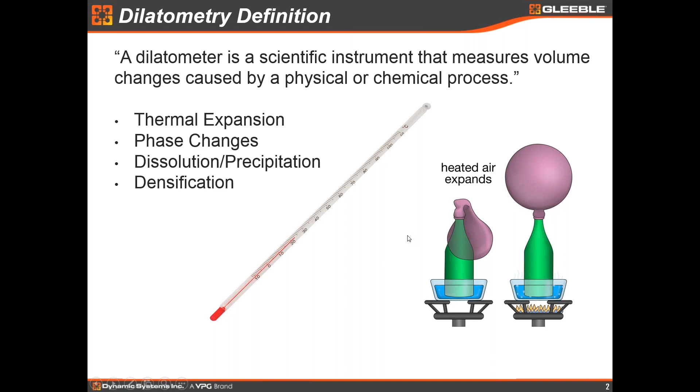Over here we can see a very simple, elementary school science fair experiment that shows heated air expands as we put a bottle full of air in either a bath of ice water or heat it up on a burner. We can see the air inside the balloon expanding. Essentially, that's all we're doing in a Gleeble: measuring the expansion of a metallic sample as we heat and cool the material.

As we heat and cool the material, there's a lot of things that happen in a metal that are a lot more complex than what I've just described. Obviously, the coefficient of expansion is essentially similar to what we've talked about already. Coefficient of expansion is fairly simple and fairly easy to measure. It's usually for metallic materials reasonably large, so the resolution of the measurement that you need to get a good coefficient of expansion is not really that difficult to achieve.

The other thing, and probably the primary thing that people use Gleeble for in dilatometry mode, is to measure phase changes. Phase changes are critically important in the treatment of steel, as the steel changes crystal structure from ferrite to austenite and can absorb a lot more alloying elements in austenite. Then typically we quench back down at a fast cooling rate from that austenite in order to get several of the different structures that you can get in steel - pearlite, martensite being two of the most common ones, also of course bainite, and then the spheroidized carbide, perhaps if we cool very slowly and let this pearlite carbides spheroidize.

Alpha and beta titanium are also very critical. There are a lot of titanium alloys that are designed around the alpha beta titanium transition. The alpha beta titanium transition is a much lower volume change transition than the ferrite austenite transition in steel, so it's a little more difficult to measure, but still can be measured in dilatometry.

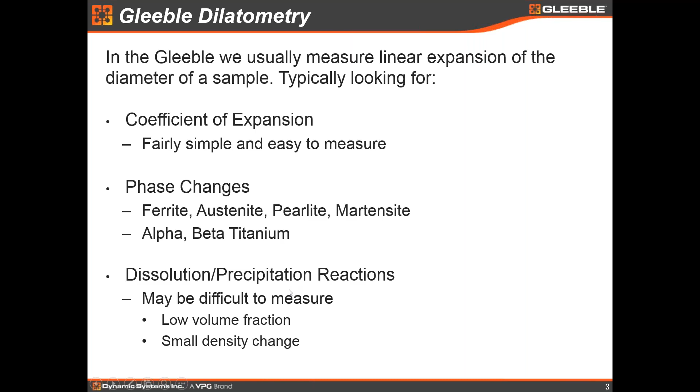The third primary thing that people use dilatometry in metallurgical research for is dissolution and precipitation reactions. Now, these are actually often quite difficult to measure. The precipitate in a metallic material is usually a very low volume fraction of the entire material. Therefore, even if you have a reasonable density change from a solid solution material to a precipitated material within a metallic sample, if you only have 2, 3, 4% volume fraction of that precipitate, it can be very difficult to measure that using dilatometry. And often the products of precipitation have a relatively small density change from the solid solution. Combining these two together means that it can be quite difficult sometimes to measure dissolution and precipitation reactions, but not always impossible. Just something to keep in mind.

I would like to point out that we do dilatometry a little different than most other manufacturers in that we usually measure the diametral change of a round sample. A lot of other machines are configured to measure the length change of a sample, and there are reasons that we do this, and I'll get into those in a little bit. Just keep in mind throughout this presentation that we do measure the diametral change typically when we're doing dilatometry in a Gleeble, and that is a little bit different from most of the other equipment that is out there.

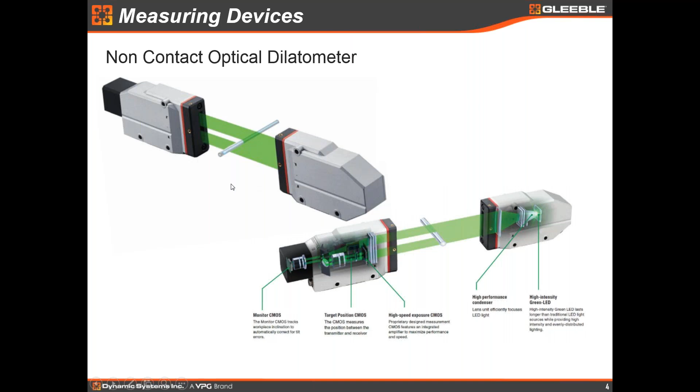I won't go into a lot of information on the optical dilatometer. It's a very nice device. It doesn't require a lot of setup. Once you have it attached to the Gleeble vacuum tank, you don't have to clip on or off the extensometer, so it's got some benefits. It does have some high temperature limitations, although the newest model is quite good. It has enough high intensity light to measure the dilation of a sample even at quite high temperatures when the sample may be fluorescing quite strongly as well.

I'd like to take just a moment to talk about the benefits of the Gleeble when you're doing dilatometry. The Gleeble is a bit unique in the world of scientific simulation equipment in that we use direct resistance heating to heat our sample.

I'll compare and contrast this a little bit to induction heating, though the same points will apply to furnace heating. In a Gleeble, we clamp a metallic sample between two grips, usually copper, maybe stainless steel, that are mounted in water-cooled jaws.

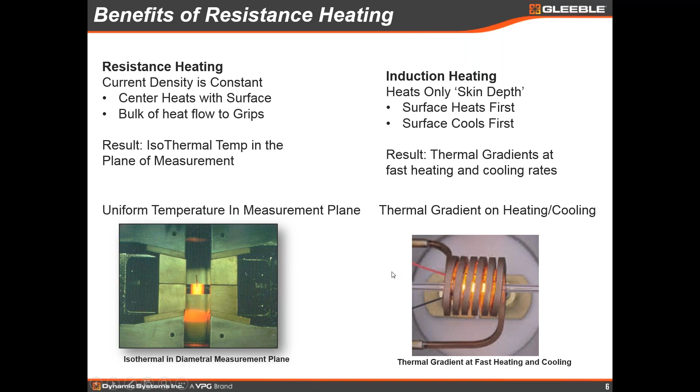This means I can cool at a very, very fast rate and maintain that isothermal plane in the center. Compare that to an induction heater where I'm probably quenching on the outside because I'm not extracting much heat through the quartz push rods here. My surface is going to cool faster. If I quench on the outside, I'm going to cool the surface much faster, but the center is still going to be hot. And again, I'm going to get thermal gradients in my measurement that are going to affect the results.

So again, similar to when we have this clamped in cooled water in copper water-cooled jaws, we get a very, very fast heat extraction rate from the ends of the sample. But again, the heat flow is almost entirely axial through the sample, which means we can get very, very fast cooling rates, while again measuring dilation in the diametral direction in the center of the sample, where we keep an isothermal plane, surface to center to surface. So we can get very sharp dilation curves, and we can get very good temperature readings of where these transformations occur.

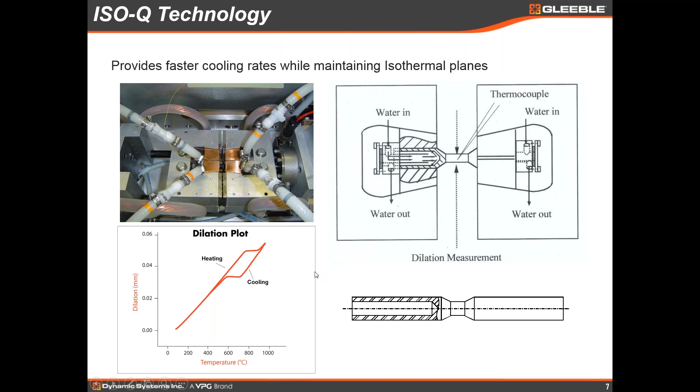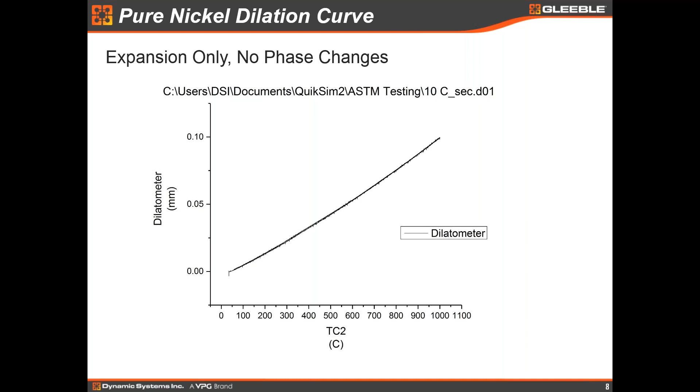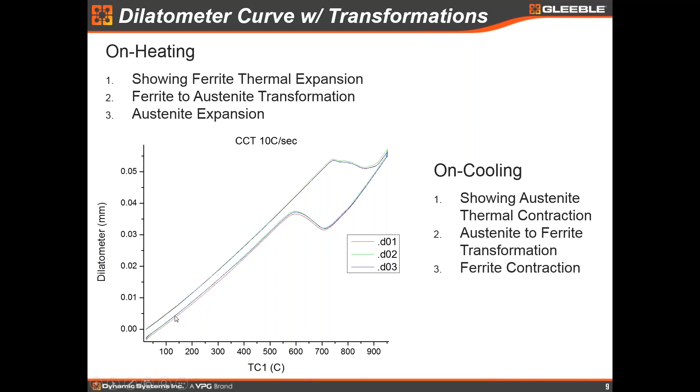So as we initially heat, the on-heating curve is simply the expansion of the ferrite. Then we hit a temperature where the ferrite starts to transform to austenite. We get the transformation, and once we've 100% transformed into austenite, we start again on a linear expansion of the austenite. Then at some point we hold for a few seconds before we start to cool, and we see the thermal contraction of the austenite. Again we see that phase transformation going back the other way as we cool, austenite to ferrite, and then we see the linear contraction of the ferrite as we continue to cool down.

So one thing to notice on all these curves is that there is an energy barrier to be overcome for transformations. Once we get to that point where ferrite and austenite are equally energetically favorable, we have to provide a little extra energy - either overheating or undercooling, depending on which direction we're going - to make that transformation happen. So what this means is that transformations are delayed a little bit until there's a sufficient thermal driving force to drive that crystallographic transformation. There can also be some nucleation times involved.

So if I was doing a quasi-static experiment where I was heating very, very, very slow and cooling very, very, very slow, I would still not have much of a nucleation time because I'd be going slow, but I would have an energy barrier to overcome. I'd still need some superheat or some undercooling to get these transformations to proceed. And you see that in the austenite to ferrite transformations, they're shifted, whether I'm doing an on-heating curve or an on-cooling curve.

One of the other things that's important to mention, and one of the big benefits that Gleeble has when doing dilatometry, is that speed matters. I've spent some time explaining why we can get good measurements at very fast heating and cooling rates in a Gleeble, where that may be more difficult to get in some other machines. The faster the cooling and heating rates are, the more these temperatures will shift based on the heating and cooling rate, and therefore the more that Gleeble technology becomes an important factor in being able to gather accurate data here.

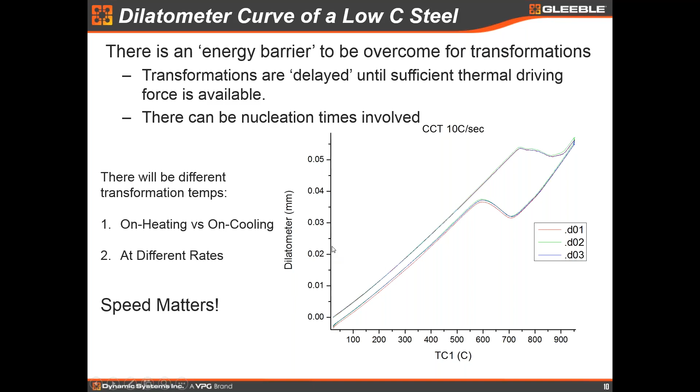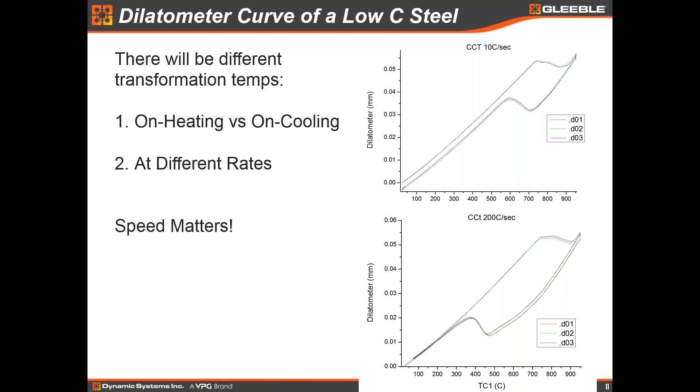This shows again the same low carbon steel, with a cooling curve at 10 degrees C per second and a cooling curve at 200 degrees C per second. I believe these are probably heated at the same rate, so there's not a lot of difference in the heating curve, but you can see a significant shift of the transformation temperatures on cooling to a lower temperature. That's based on the nucleation rate I talked about, and the fact that you need a little more undercooling the faster you're going to kick off that reaction. So speed does matter, and that's why some of the Gleeble features are very important when doing fast dilatometry for fast heating and cooling, for things like welding or other applications with rapid heating and cooling rates.

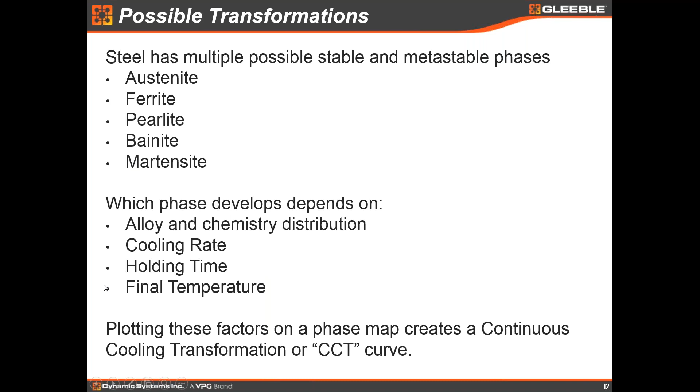I've mentioned a little bit about possible transformations that could occur in steel, primarily steel, although there are transformations in many other materials. Steel is a very useful engineering material because it has multiple stable and metastable phases. Depending on the properties needed in the final product, we can have steels that are austenite, ferrite, pearlite, bainite, martensite, or mixtures of any of these phases. Which of those phases develops depends on the alloy and chemistry distribution in that part, but largely on cooling rate, holding time, and the final temperature we quench to. So it becomes a big challenge in the steel industry to develop process maps showing which of these phases will develop under different holding times, cooling rates, and processing parameters.

If we plot all those onto one curve, we get what we call a continuous cooling transformation curve. This simply shows maps of different structures that can be formed on cooling of a steel, under faster, moderate, and slow cooling rates. If you superimpose those cooling rates over this structure map, you can predict, based on experiments done using dilatometry, what phases you're going to get. One of the tasks of many metallurgists developing a new alloy is to develop these continuous cooling curves so their customers know how to process the material and get the microstructure they're looking for, be that bainitic, ferritic, pearlitic, martensitic, or dual phase.

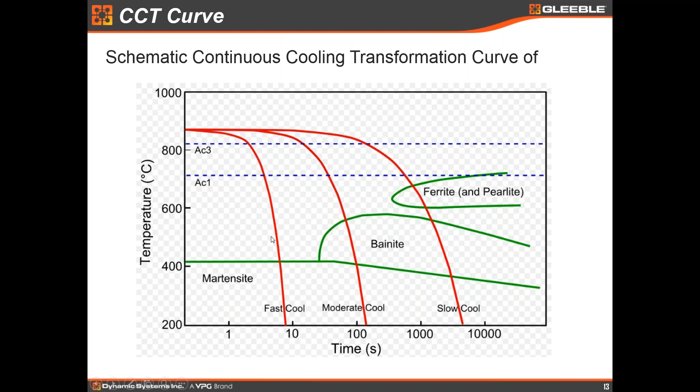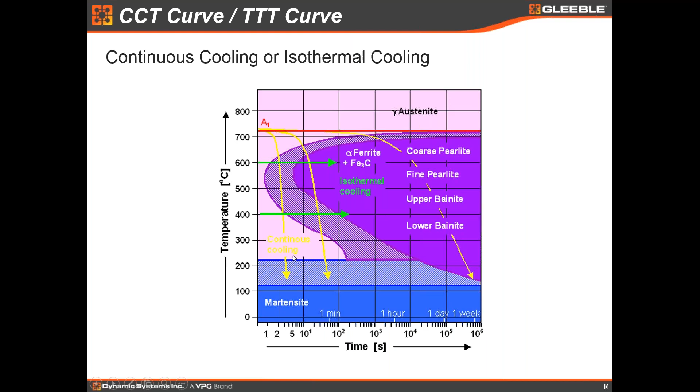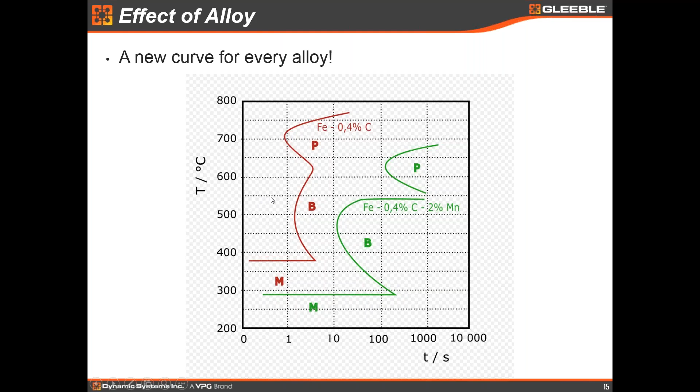This illustrates a bit more what I've just described, that the alloy is very important here. These are simply two CCT diagrams for the same steel, a 0.4% carbon steel, except one has no manganese and one has 2% manganese. You can see the manganese shifts all these curves over to longer times. So we would say this steel has better hardenability, because I can quench in martensite much easier in this steel, making it a more hardenable steel. Manganese is, of course, a well-known hardenability element. Chromium, molybdenum, boron, and other hardenability elements can delay some of these transformations and allow the steel to be more easily hardened, with a lower quench rate. And if I have a lower quench rate, I can avoid some quench cracking and other problems.

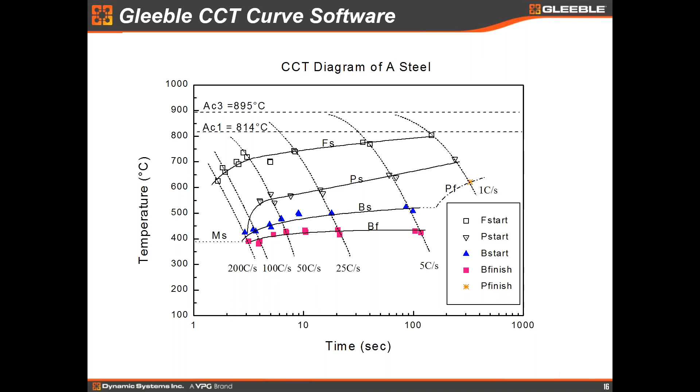This slide discusses how to create a CCT diagram with the Gleeble. The Gleeble comes with an option to not only do the dilatometric work to determine where these transformation points are, but to also plot them on a CCT diagram. I won't talk a lot about this software package, but I wanted to point out that it can take the data you generate from Gleeble dilatometry at different cooling rates, plot it on a map, and create a CCT diagram for any given steel you may be working with.

I'm going to go over, in these last couple slides before I wrap up my part of this presentation, a couple of questions that we often get about dilatometry curves.

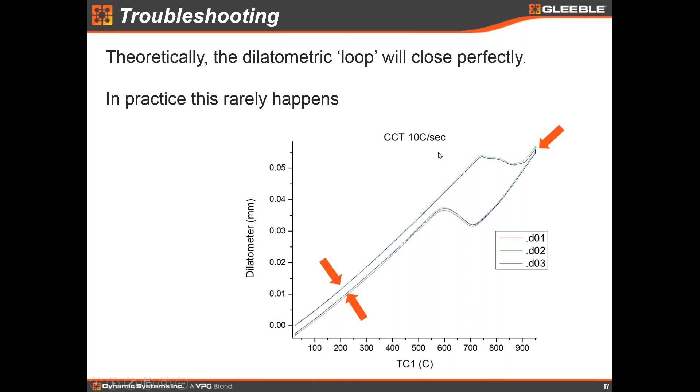Theoretically, a dilatometric loop, as I'll call it, a heat up, transformation, cool down, retransformation, and then cool back to room temperature, should close if everything is absolutely perfect, but in practice this rarely happens. In this diagram I have a couple things going on: I don't totally close the loop, so I've got a little bit of permanent change of diameter, illustrated by these two opposing arrows in the lower left of the graph. I also have a little bit of a decrease in diameter at the hold time when I transition from heating to cooling. I'll talk a little about what can cause these kinds of issues.

The primary reason dilatometric loops don't always close is that the phase you end up with after the experiment is often not the same phase you started with. This graph shows three different curves, and they're very repeatable, so it's not a problem with the repeatability of the system. What I suspect is happening is that I probably started with a sample that had a little bit of bainite or martensite in it. Then at 10 C per second, after I heated, austenitized, and recooled it, I probably ended up with a ferritic plus carbide microstructure. We know martensite has more volume expansion than a ferrite plus carbide phase, so I suspect that's what's happening here, though I don't know that for a fact.

Another thing that could be happening is that these are rolled samples. Whenever you do a rolling deformation, you get a texture in the material, so it's not truly isotropic, but has a rolled texture with preferential crystallographic orientation through the product. Once I heat that product up and cool it back down, I've randomized that texture and probably changed the dimensions a little bit, since different crystallographic planes have different densities. That's a very small effect, and I doubt that's what we're seeing in this graph, but it is something else to keep in mind.

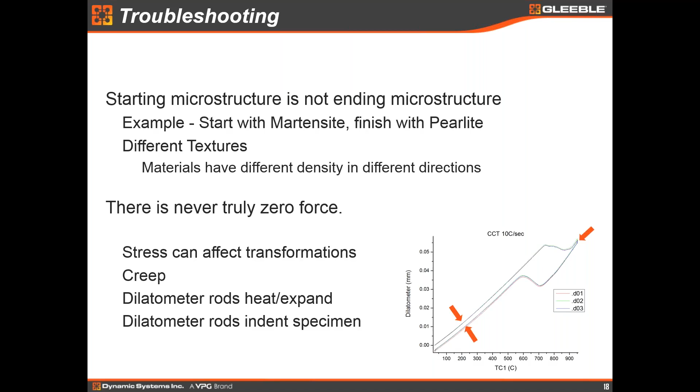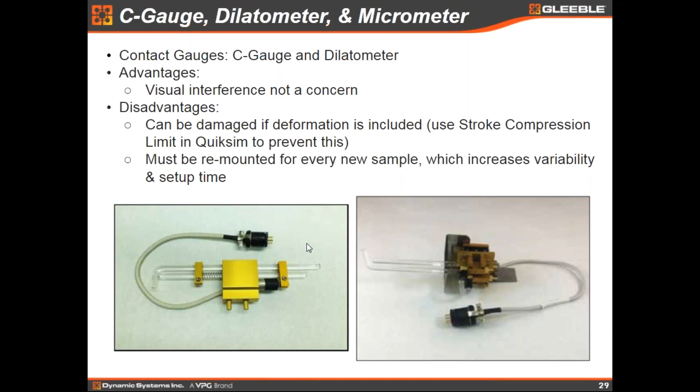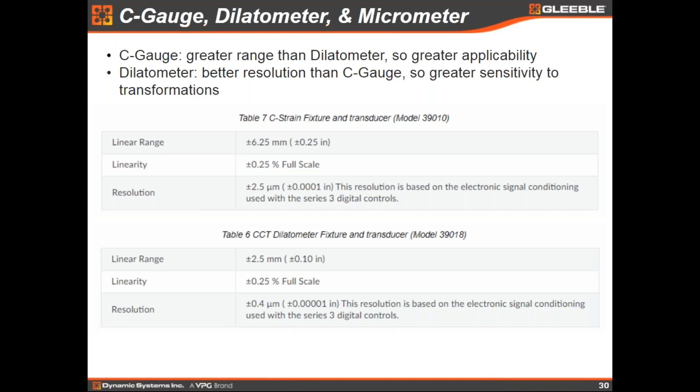Between the two gauges themselves, there are some differences. The C gauge has a significantly larger range, almost 3 times as much, but the resolution's significantly reduced, so about a factor of 5 or so. The dilatometer has significantly better resolution if you have very subtle transformations that are very subtle volumetrically—the CCT dilatometer will definitely be a better bet. If you expect to have much more significant change, though, you may have to use the C gauge instead.

So kind of conversely to what the contact gauges have advantageously, the micrometer is perfectly safe from damage unless your sample really explodes or something and goes right through the glass on the other side through which the micrometer is watching. But generally speaking, the micrometer is safe from damage from your dilatometry tests, so you don't have to worry about that at all.

And once you have adjusted, there's no need to readjust the micrometer. If your test doesn't change, it's a different sample but same dimensions, same presumed location of interest for the dilatometry itself, you can leave your micrometer just as it was, and it should work very, very similar the next time.

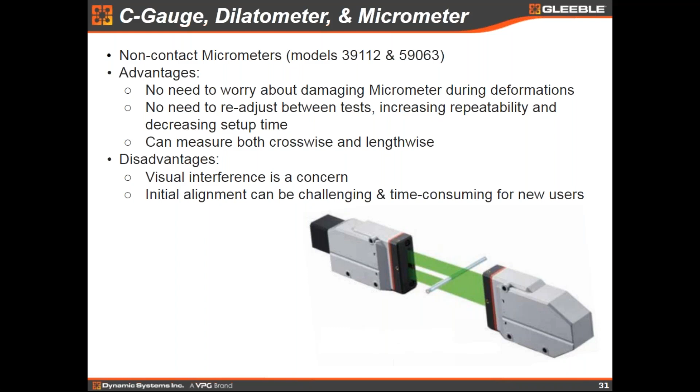Also, for newer users who haven't done it a handful of times, the initial alignment to get the beam to go properly from the transmitting head to the receiving head is a little bit challenging. It takes a little bit of getting used to. Most of the guys in my department can set them up in a few minutes nowadays, but that takes a little bit of practice. So newer users find it to be a little bit challenging.

A little more specific information about the two micrometer models. The 39112 model, as I mentioned before, is largely a legacy model at this point. Series 3 systems and the older GTC systems are what can use this device. Specifically in terms of the GTC system, that differentiates in terms of which wiring you have.

There may be a label on your load unit which mentions wiring revision, may say Rev J, Rev K, something like that. The pre-Rev K machines are electrically compatible, the wiring is compatible with the 39112 model. The subsequent wiring revision, Rev K, as of this point in time, is compatible with the 59063, which I believe is a newer model. It's higher power, the range is more significant, the sampling rate is more significant. So it has more benefits largely, greater applicability.

The higher power allows it, for instance, to better bend the beam in different ways so that you can use it with the tracking mirror setup that we have, to try and follow the dilation during deformations, things like that. It has a little more applicability.

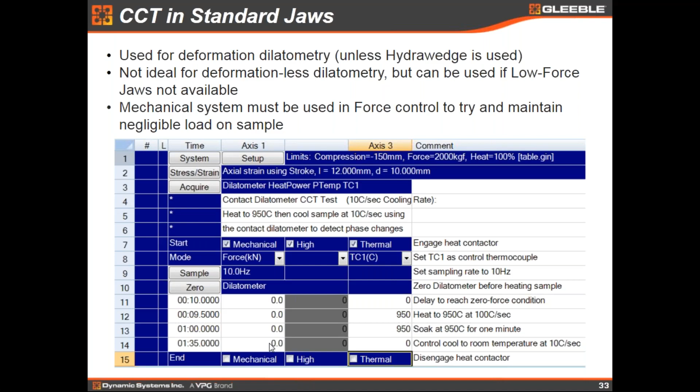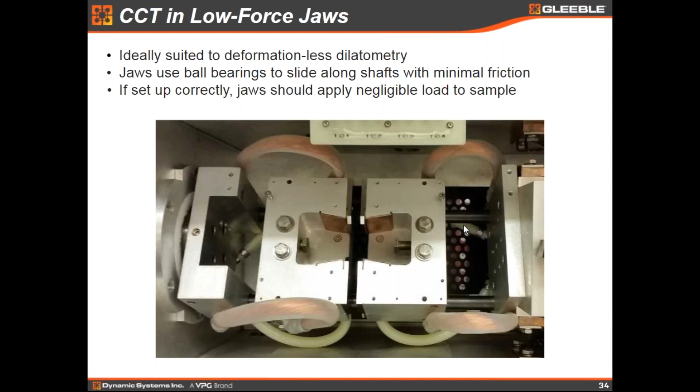The low force jaws are really what's meant for dilatometry work, and they do a very good job with that. The jaws have a ball bearing system that slides along those black shafts with minimal friction. If set up correctly, there should be negligible load on your sample with these, so it's a pretty good option for dilatometry.

I'll briefly touch on ISO-Q setup. Brian did a good job of already talking about most of this. As he said, it enables internal quenching, which is difficult to do otherwise. You can do external quenching with dilatometry, but that leads to more complications.

The benefits of internal quenching are that you can maintain vacuum, so there's not a concern in that regard. If using the micrometer, it's also not going to interfere with the micrometer reading at all. Blasting water around, potentially moving your thermocouple, could cause problems otherwise, so internal quenching is very useful for that. As mentioned, it can be used with both gas and liquid quench media, and both work just fine.

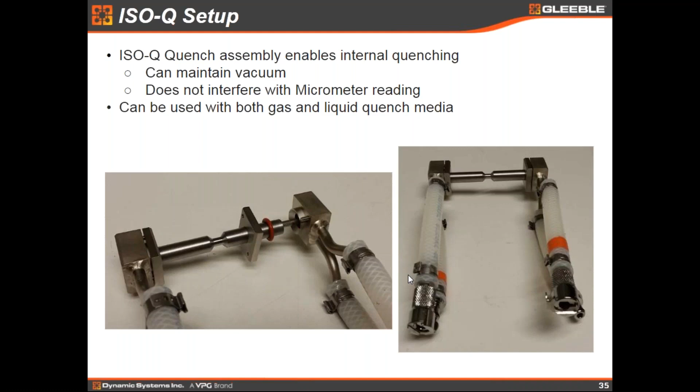Brian already talked about the general geometry, shown here. There's a hole bored through most of the way, not quite all the way into the sample. That's our typical geometry, which maintains a pretty good radial isothermal plane, and cooling rates up to 400 C per second are reasonable to expect with this.

We can go higher than that. We have designs for samples that bore the hole all the way through the sample, which gets you significantly higher cooling rates, 1000 C and beyond. But from some of the testing we've done in the past, the isothermality of the radial plane is not maintained at that point, since you're going all the way through the sample.

So to get really the best data you can get, it requires a little more work in that regard. We have an app note that I'll mention later on, if you're interested, you can take a look at it and learn a little bit more about that.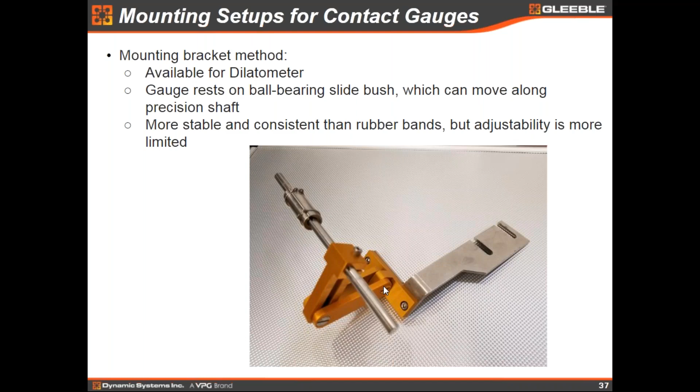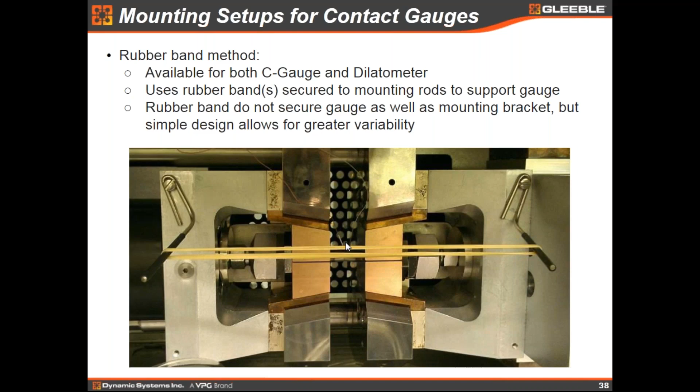The rubber bands, on the other hand, can be used with both the C gauge and dilatometer. Simple setup: you just have these mounting rods here and here, and rubber bands—one, two, however many you want—go between them, and then you stick your gauge right in the middle and try to secure it the best you can. The benefit of that is you can orient them however you want, and do a lot of different things with that. But the gauge isn't as securely mounted, obviously. If you're taking it in and out a lot, there's more variability potentially, and less of a guarantee that you're really measuring just that isothermal plane—you might skew it across the sample a little bit. That can happen more easily with this method than with the mounting bracket.

One thing I want to touch on is the cooling to the contact gauges. I've seen it on an occasion or two, let's just say, where customers are using the C gauge or dilatometer but not using the cooling circuit that's provided.

These contact gauges come with some hose and a regulator, and an air hose that attaches to the load unit manifold in the back that can be used to cool the gauge while you're heating. Use air supplied from the Gleeble air water manifold to keep it from overheating and potentially damaging the gauge. If you're having a long soak or high temperature soak, your gauge may overheat, and that's not desirable. There's a heat shield on the front of the dilatometer model, but it's still best to use the air passing through the gauge to keep it as cool as we can. So if at all possible, please do not ignore that cooling circuit. Your gauge will thank you for using that.

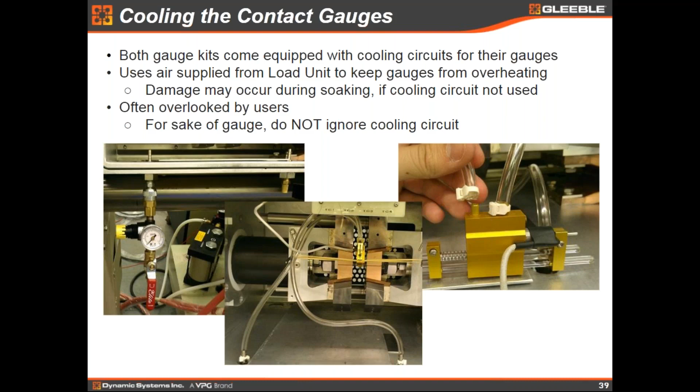Another important point is the heating cables in low force jaws. If they are not set properly, they can introduce some force.

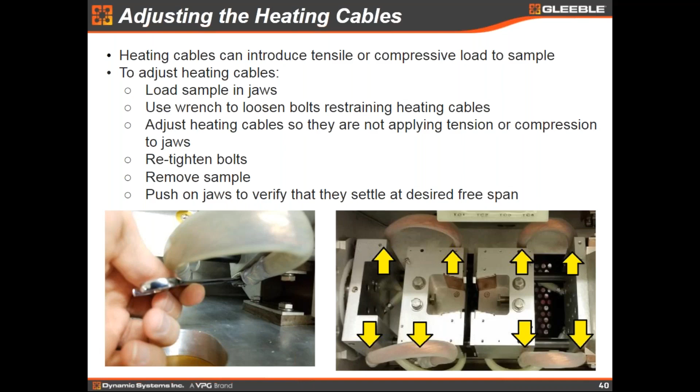Brian mentioned having excess force on your sample can show up in your data at the end, in your actual plots of dilatometer versus temperature. So trying to create a frictionless environment, a load-free scenario for your sample, is the whole point of using low force jaws. So when I'm trying to get the best out of them, it's important to adjust those before you run your tests. You want to load your sample in the jaws, use a wrench like I show in the left-hand picture to loosen the heating cables, the bolts that restrain them. Then you can pretty easily move them around and find a good position where they aren't compressing or applying a tensile load to your sample. Retighten those bolts. At that point, you can remove the sample and wiggle the jaws to confirm it's not applying load at that free span where your sample would be. It's pretty simple, only takes a few minutes, but worthwhile for your results.

One item I'm not sure too many customers have seen before is this compression method shown here. We have these special IsoQ samples with threaded portions just before the shoulder that you can use with these locking nuts shown here, and then a washer behind it, and they'll rest against the grip and can actually be compressed a certain extent. So you can compress IsoQ samples, which gets you the best of all worlds in that regard. It is somewhat limited - you only have so much free span before you compress enough to contact your gauge, if you have a gauge in there. But for that purpose, we have thinner quartz rods - the typical one is 5 millimeter diameter, and we have 3 millimeter diameter quartz rods meant specifically for this application, that you can pretty easily configure to get a little more compression if you need an extra millimeter or so.

This is detailed pretty well in application note 027, performing CCT after compression tests. If you want more information on this, feel free to let us know - we can provide you with that if you don't already have it, since that's a pretty good option.

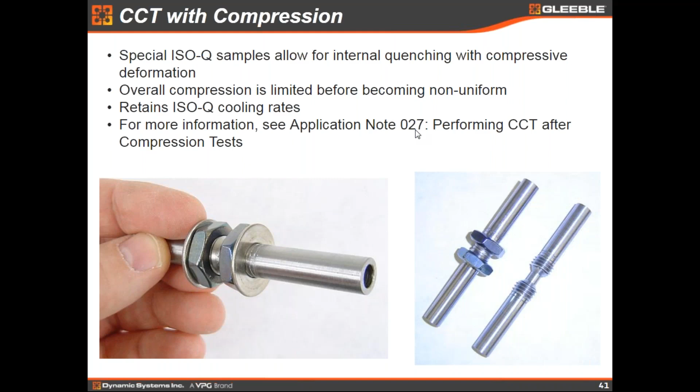The other compressive option with CCT is uniaxial compression testing. That could be done in the general purpose MCU or the Hydrawedge. You have the same capabilities for compression with either of them, but your cooling tends to be significantly reduced, so you don't have the option of internal quenching. A micrometer is certainly better suited, I would personally say, to this application than contact gauges, since if any of you have seen the Hydrawedge before, you know how forceful it is during the deformations, and I wouldn't personally want to risk breaking a gauge during that. So there's a setup kit that allows you to interface the micrometer with the Hydrawedge. I'd recommend using that in this scenario.

It's a little bit of a challenge - you have to set up the micrometer beam pretty particularly so that you get the beam where you want it, where the sample will be after deformation. It takes a little bit of figuring out, but it's doable.

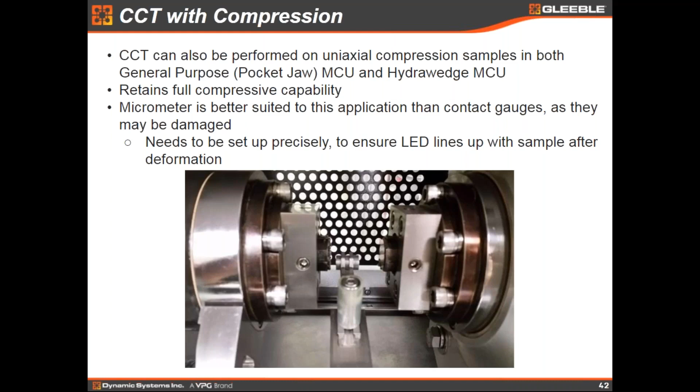I wanted to quickly show a few pictures of common issues we see on CCT. Brian already talked about one of them pretty well, but this one we see every now and then. Ideally you'd have a nice, constantly changing diameter dilatometry reading during the cooling portion, and during the heating portion too - it shouldn't flatten out too much, typically speaking. But we'll oftentimes see results like this, where it looks pretty flat here, and it's a lot flatter than shown in this nice example over here, for instance.

I've seen it before where that's the case because whoever performed the test was maybe using the rubber band mount, and so the gauge was a little bit skewed. It wasn't really perpendicular to the sample, so it's kind of measuring multiple planes, not really getting a proper isothermal planar reading. You're overlapping a lot of different planes, different transformation regimes, so it skews the look of your data.

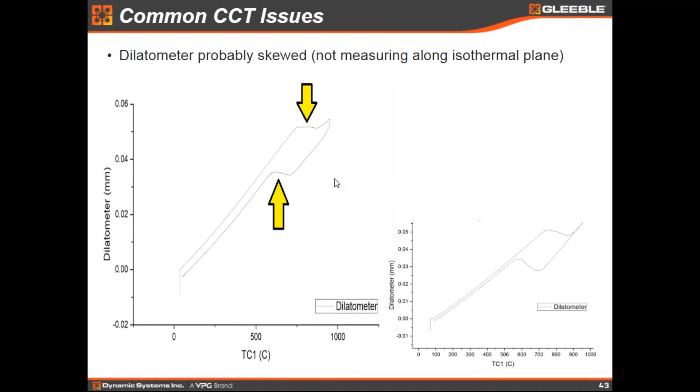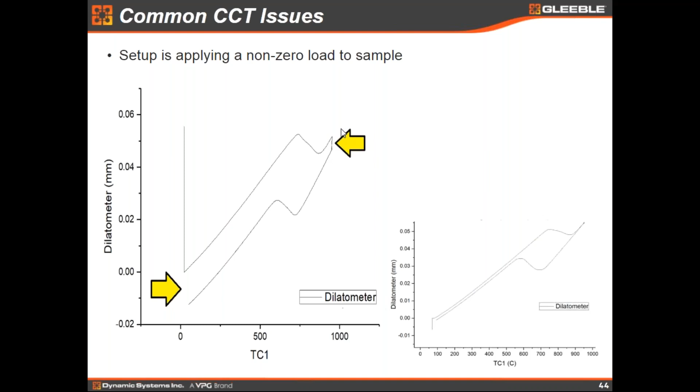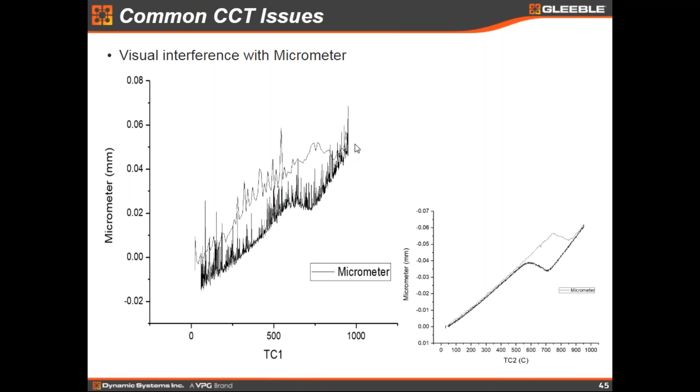I've seen this kind of thing before too. So at that point, you have to just go back in the tank and adjust a little bit, try to get rid of all that noise you have there.